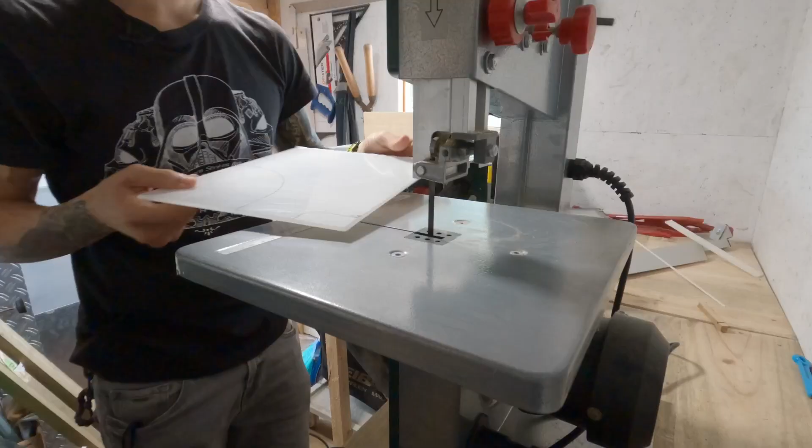Okay, I think that went reasonably well. You will have seen some time-lapse GoPro stuff that I was doing out in the shed.

So I just cut, this is an old scrap of acrylic I had. It's roughly the size I'd like for the plate to mount the components to. It's a bit short, it should be 39 centimeters, it's more like 32, but it at least gives me an idea of how I can mount stuff until I get a bigger plate in better condition. I just cut it to the right height on the table saw.

That's done. Then, using the original panel, I did a rough cut of the shape, the cutout, on the bandsaw, and then tried - thank you to Stuart for this idea - using a trim bit on a router to cut out the shape from the original panel. It gives a much better finish. I would have used my CNC, but it's not big enough for this, it's really small. So already heaps better than this.

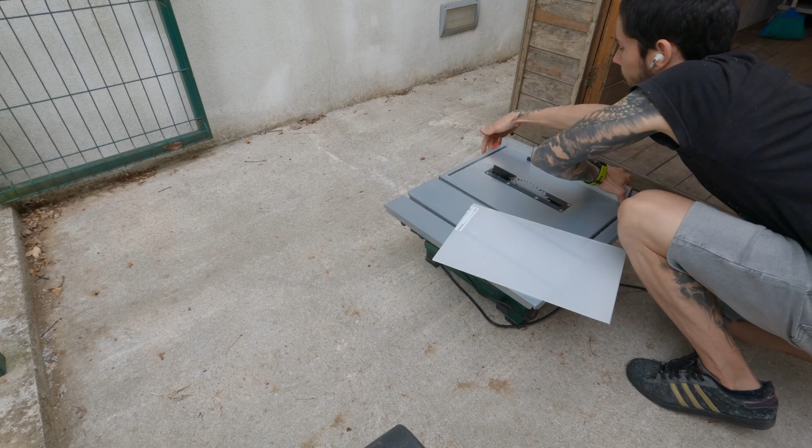It's Monday night, as you might be able to tell from the different t-shirt. Sunday got away from me - I was busy, had to go do some work-related stuff, and with that setback of having to cut a new panel, which is cut out, I still have to run it through the CNC again. I'll do that maybe during the week if I get a bit of time.

In the meantime, I have started to figure out the layout of the components on the plate that fell off, which is clear, so I'm not sure how well you can see that, but this is just a dismantled bus bar. This one is going to go like so, the negative one will go on the other side, and then the rest of the big fuses and components will go in the middle. Something along those lines - I've not settled every detail yet, but I'm happy I think it's going to fit everything I needed to fit, which was also a concern because it's a quite small, tight space.